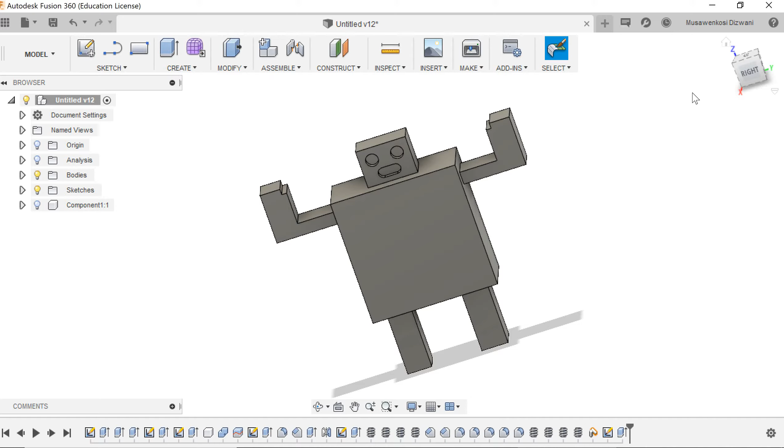and it's going to be made via injection molding. For the purposes of this video, and because my computer is slow, I'm just going to focus on the bottom half of the mold. So this is what I have. Turn this off, switch that on. So I've got the negative cavity in there of the Lego part, that'll be the bottom half, and the top half is on there as well.

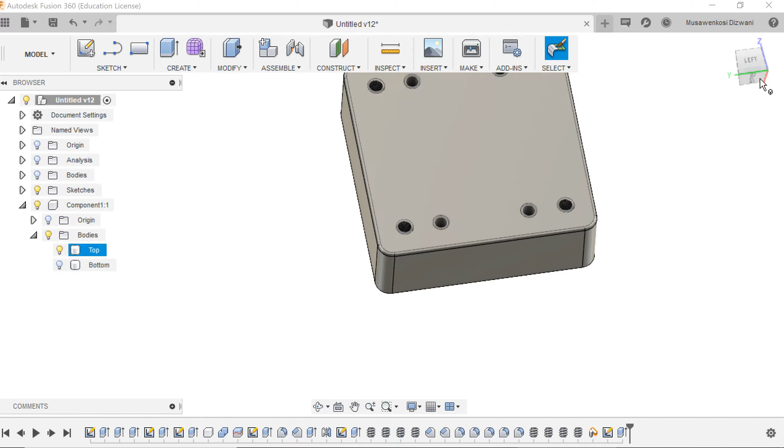Now there's quite a lot of stuff that's missing on this mold, like a runner system and where the coolant pipes are supposed to go through. But just for the purpose of this video, I just want to focus on the cavity and getting that machined.

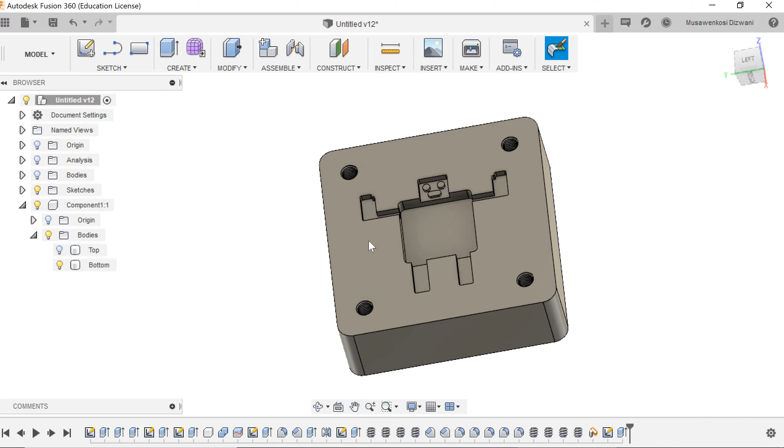Okay, so there we go. So on here we've got our M12 tapped holes, and to locate them I'm going to have 10mm H7 bores for the location.

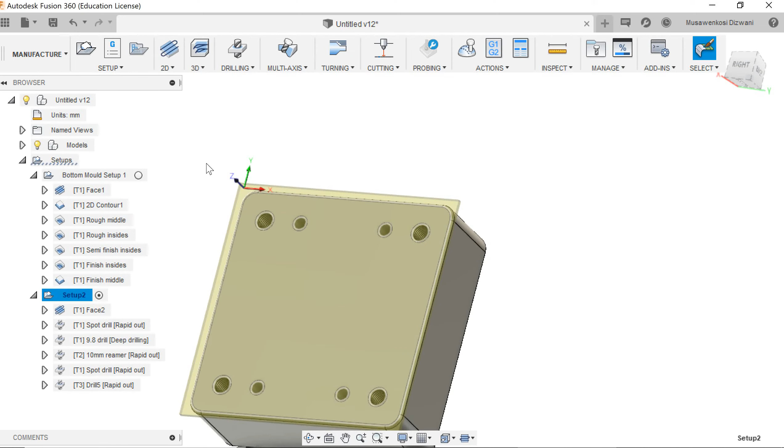Okay, and then I'm going to go here into manufacture. So the first op, this is what we're going to have. Let me just simulate this. Let's slow that down a little bit.

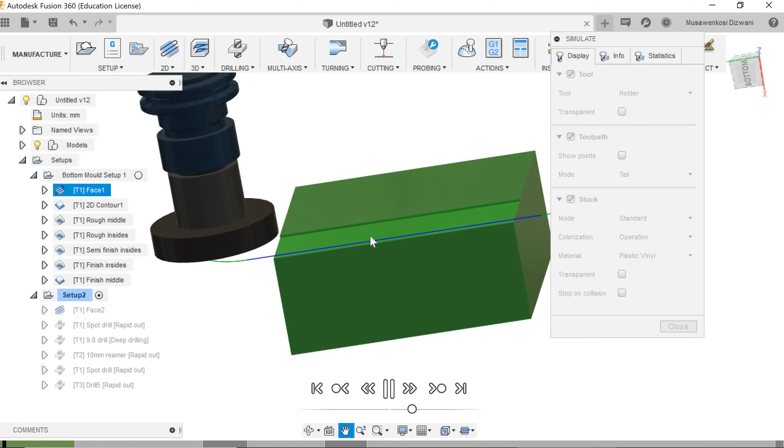Okay, so for my stock material, I'm also going to - no, I'm getting ahead of myself here now. Let's go back into model.

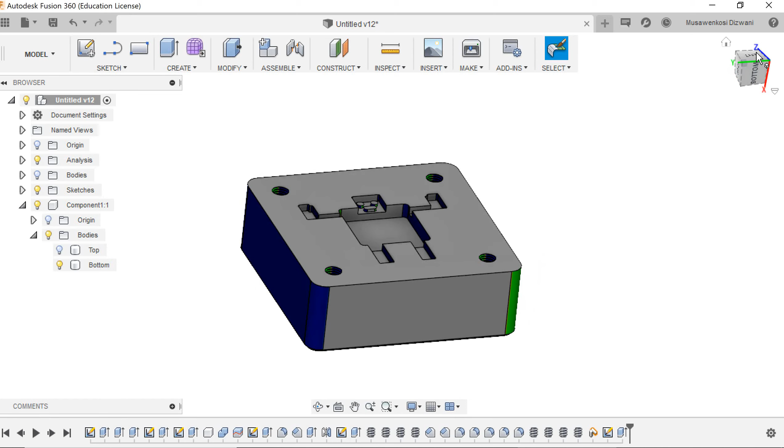I've done a draft analysis as well. I think I've got about 1.8 degrees of draft. That's just to allow for the shrinkage, and we'll be able to get the part out of the mold after injection molding. But I don't think I've got it perfect. Also, what I can do afterwards.

Okay, let's go back into manufacture. So we're going to machine this. Let's just simulate what I have.

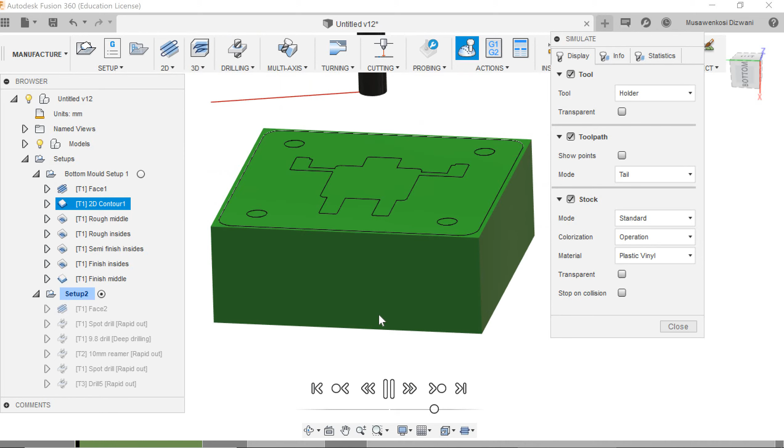Okay, so I'm going to face that, and then I'm just going to profile around it, and I'm using a 2D adaptive in Fusion 360 just to get rid of as much material as I can in the cavities. And yeah, that's all it's doing, is just roughing inside.

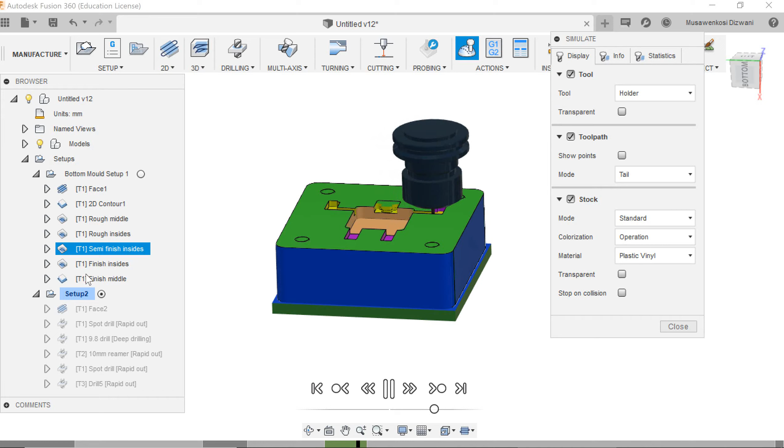And that's a, yeah, it should be a 4mm end mill roughing, and I've got a 3mm end mill doing a semi-finish, 2mm end mill that's just gonna finish everything in there. And what size was that? I think that's a 4mm end mill that just finishes that core there.

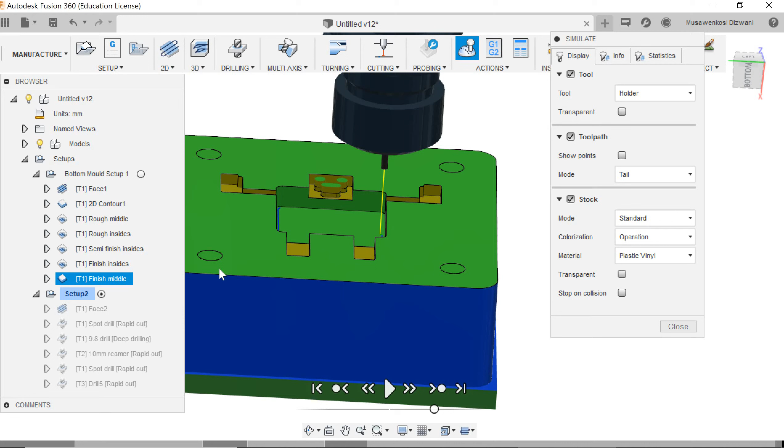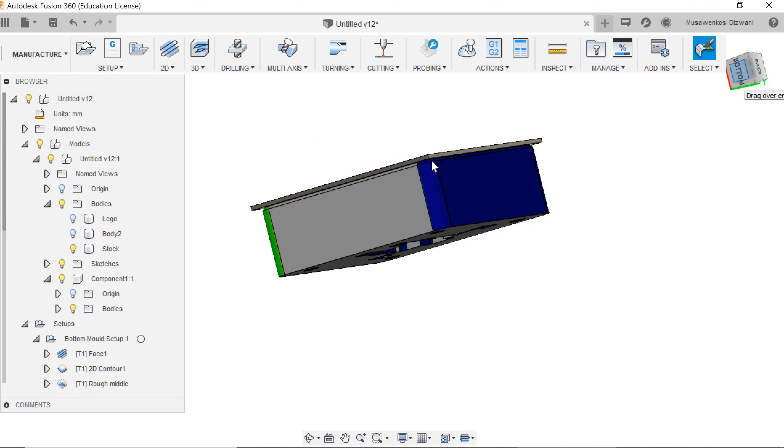And then for the second op, I'd modeled my stock. Let's see. Yeah, so that's the stock that we're gonna have in the second op. Okay, let me turn that off. Okay, I'm hoping my computer doesn't crash.

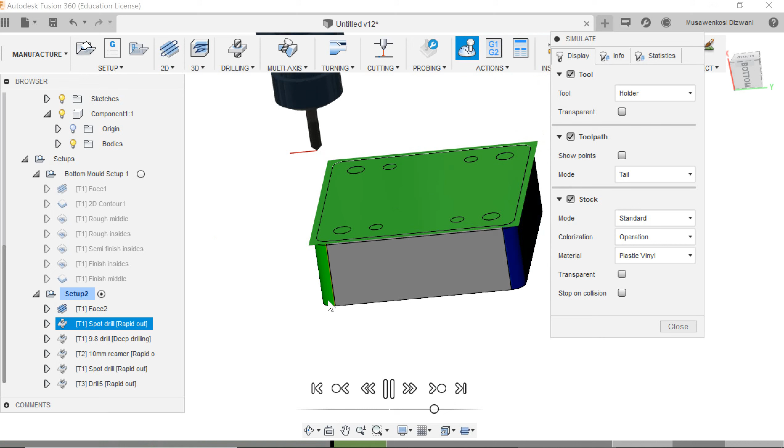Okay, right, so for the second op, we're just going to face it, spot drill, and I've got a 9.8 drill going in there, and we're going to ream the holes because we need quite, I'm guessing we need a tight fit on there.

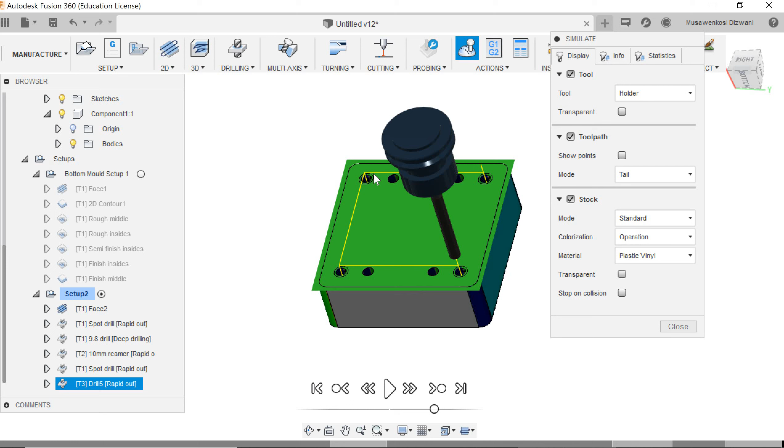And I'm actually going to stop it here because my computer is starting to slow down. So for the tapped holes, that's an M12 6H, so I would use a 10.3 drill, and then I'd finish it off with an M12 tap, and then obviously just chamfer that, but I'm feeling my computer is gonna freeze, so I'm just gonna stop it on there.